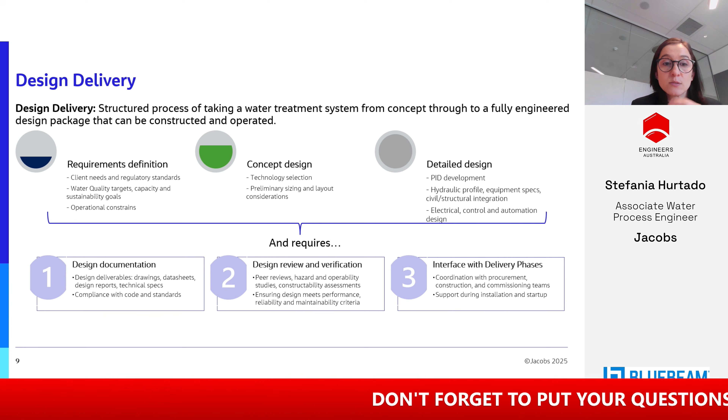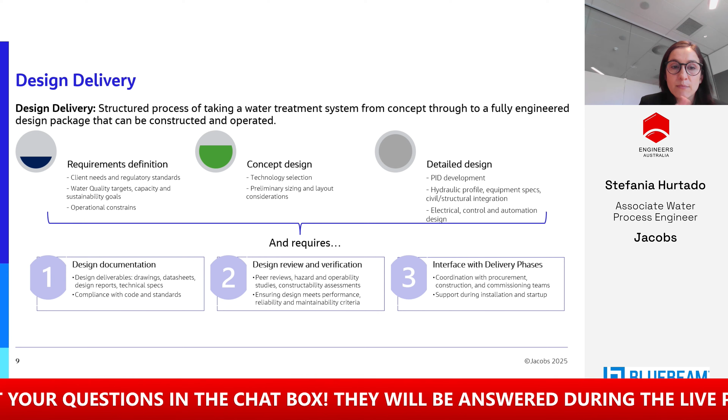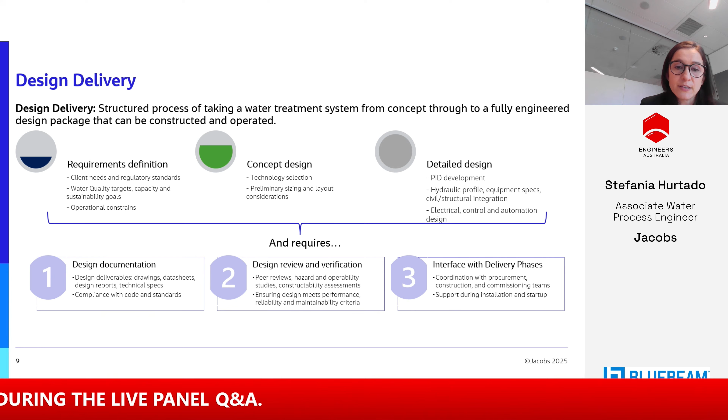Once that's done, we need to review and peer review across the team to make sure all the requirements are met for each discipline, and also ensure that performance, reliability, and maintainability criteria are met, through the lenses of constructability and safety in design.

Once the design is finalized, the process doesn't end there. We need to support the interface with the delivery phases that come after design—coordinating with procurement, construction, and commissioning teams to support the installation and startup of the plant.

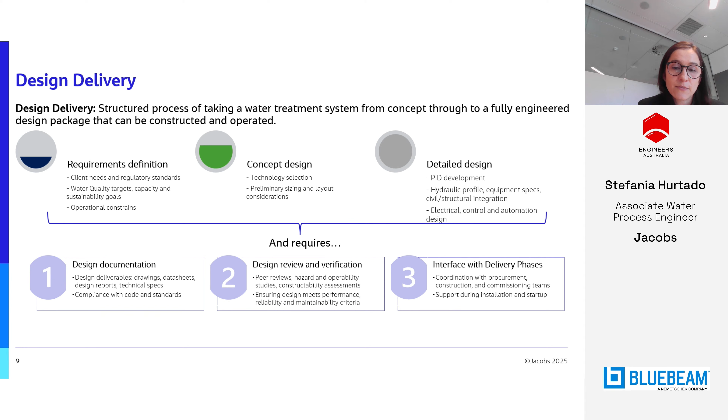Translated into a day-to-day basis, this is pretty much a workflow that allows us to put together the design over time. Implementing these steps helps us be efficient, especially when multiple projects are happening at the same time. In simple words, we have discipline-based calculations that we translate into dimensions, and those dimensions are used as an input to draft sketches.

Those sketches go into the modeler or drafter to put together a model, and then this 3D model is cut and basically used to cut the drawings for a standard design package.

Once the drawings are cut and the model is done, there is a period where technical review happens across both types of deliverables, and then the consolidation of multiple discipline feedback is collected in a way that is easy to understand what the clashes are, if there are any conflicting solutions, and how to resolve particular issues found during this period.

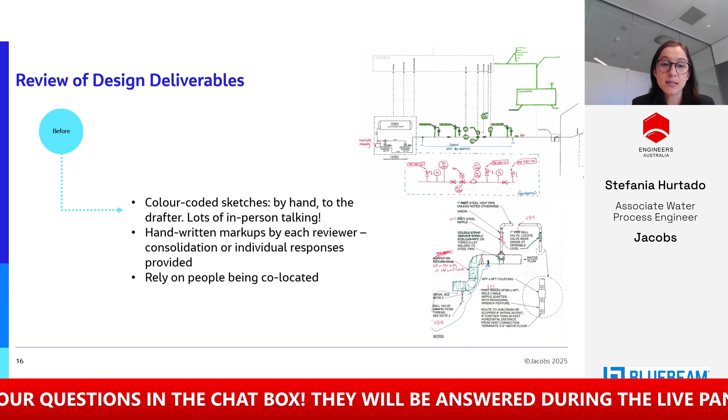There was lots of talking in person. You were sitting next to the drafter, sitting next to the reviewer, and you were chatting all day long about things that needed to be refined in the project or the particular package you were working on.

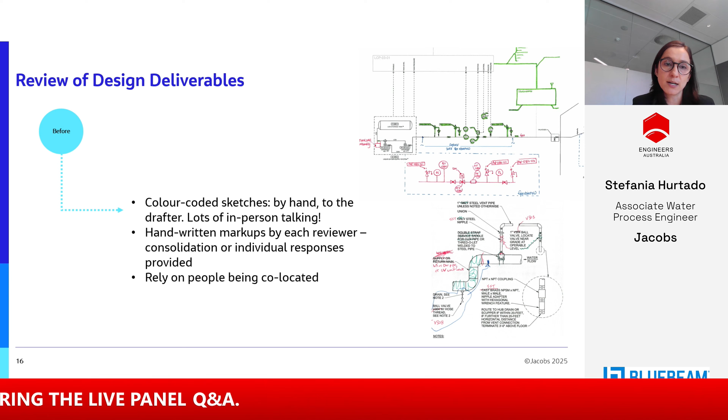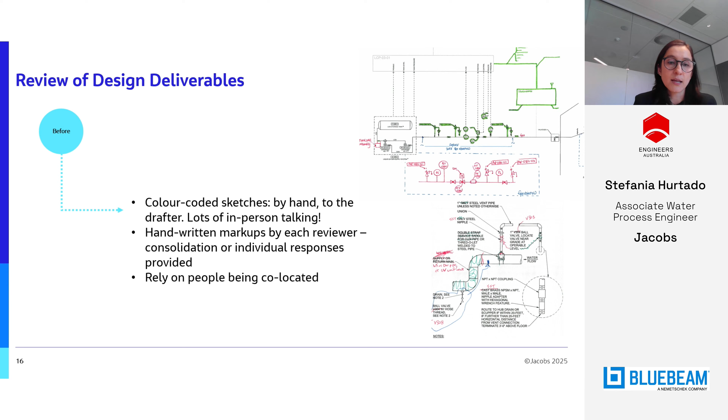Once drafted, those markups were reviewed by a reviewer, and comments were provided again by hand and collected by someone. So there was a collector. Usually this was a grad or an intern, and that person spent lots and lots of hours trying to collect hand markups from 20 people in the team.

Once those were collected, we used registers and logs referring to specific drawings or specific areas of the drawing to help with referring back to those.

We addressed markups by hand at that time. So anytime you needed to put something, you put it on top of it, and you kind of crossed out, again by hand, the things that you had addressed.

There was no tracking of consolidated comments except for that one register, but it was really hard. You had physical prints of the P&IDs that you were archiving in physical archives in the office, and it was a bit of a struggle trying to go back to that. It required time.

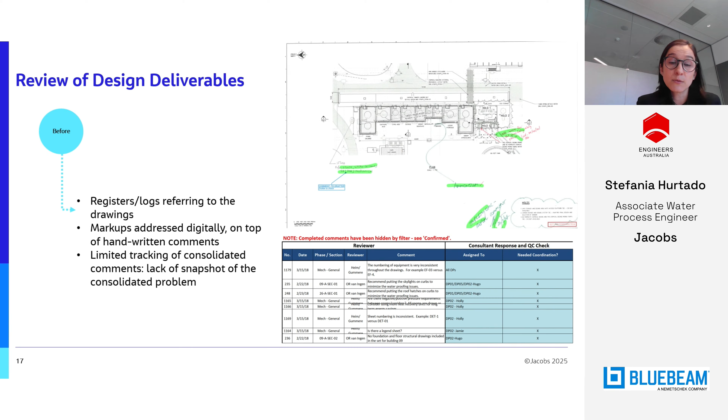So then we realized that we could standardize certain things to allow us to do things faster. This is, I think, when we started what I call the beginning of the change. We started using simple tool sets in Bluebeam and Visio.

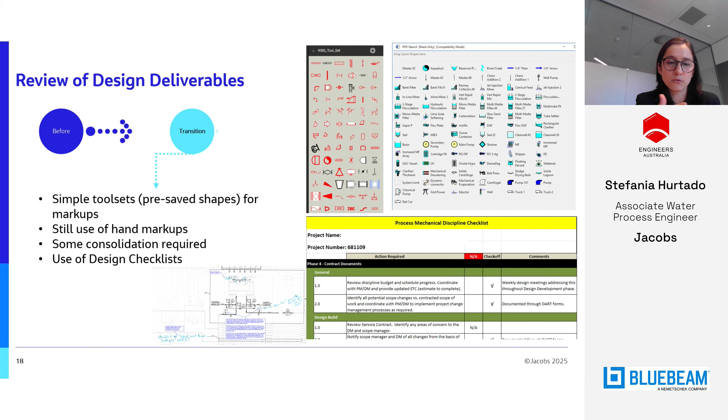We started seeing people using tools to reply to review comments in PDF. There was a mix of hand markups and digital markups on top of the hand markups. And for quality, we defined and used discipline checklists to ensure that reviews and checks were done the same way, looking at the same things over and over again during the design phases of a project.

Now we're fully digital because we were forced to accelerate the learning curve by working from home. So we completely shortcut the consolidation step. Again, no time allowed for that.

And then the sketches, now we have the ability to draw them digitally. Comments are usually placed in one place, and then you have faster troubleshooting because you have everything recorded in the same way in a simple, consolidated place.

The tracking happens in parallel with addressing the comments. There is no grad or intern that consolidates the comments anymore. They actually are very active in the development of the design, and everything happens a bit faster.

There's not a single software that will accomplish everything you need in one go. It depends on what you have available, what you feel more comfortable with, and what is defined as the best practice for the project.

So I'll talk about the ones that I have used so far to develop my design sketches, and I'll show you a little bit of the pros and cons in my view that have helped me using one or another. So PowerPoint is very familiar to everyone, is universally available. We only need the standard Microsoft Suite in order to use it, and it's very practical.

The problem is it doesn't come with a toolbox, doesn't track any changes, and it's not identified as an engineering tool as other tools that we see in the market for the same reason, for the same purpose.

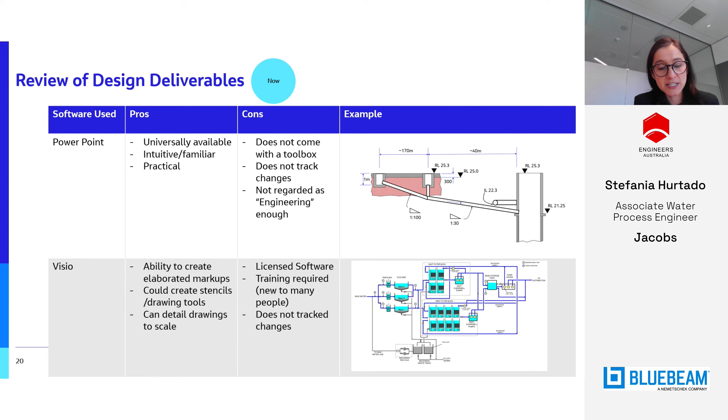Bluebeam is quite a good one. It's good for detail and dimension drawings, and it produces great drawing markups. It comes with the ability to use a tool chest and library of symbols, so it's easy - technically easier because you just drag the symbol and put it in there, and there is ability to produce very, very detailed, almost as-built drawing markups.

What I love about Bluebeam is that it does provide the feature of consolidating the tracking of comments, and what you see there is an example of how that looks.

You can do it in PDF, or you can export the PDF tracking log or comments log into Excel, and there is ability to filter by a specific topic, by a specific person, or by a specific drawing. It is a licensed software, so there is a little bit of reluctancy sometimes, especially when the other party doesn't have the license, and there is some training required because there are so many features available to this tool that it requires some dexterity to use it better.

Outside of the engineer fraternity, people are not as familiarized with this software, but in general, it's a great tool to have.

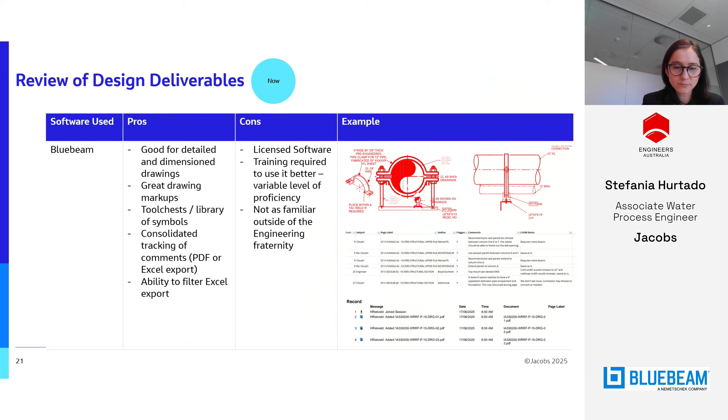Because it's so great, we have been using Bluebeam a lot for different purposes during the design delivery. It's becoming our repository of drawings, especially P&IDs, and the main software we use for design reviews of P&IDs throughout studio sessions. We follow a folder structure that allows us to track individual design packages, disciplines, and design milestones all in one place.

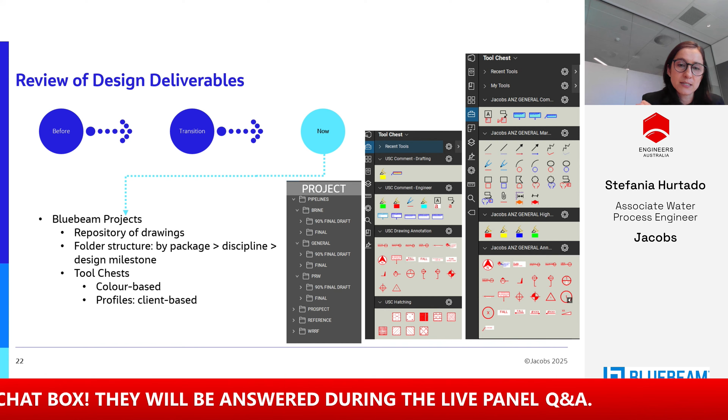You see the example there. The project is split by pipelines, and then the pipeline has the brine pipeline, and then you have 90% and final. It's basically a way that we found to be able to track things easily and have everything in one place.

We have developed tool sets that allow us to assist not only engineers but drafters with the markups. So we have color-based profiles - one color for the engineer, one for the drafter - usually based on client standards to be able to draw things. What you see there is the two toolsets that we have for one project in particular.

And then the other one is the Jacobs general toolset that we use for pretty much any project.

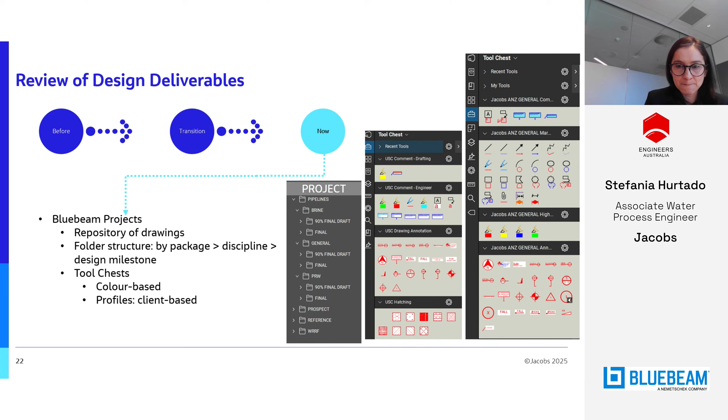The studio sessions are what we use in order to do interdisciplinary reviews. The nicest thing about this is that it records or serves as an archive of all the different rounds of reviews that have gone through a particular drawing or set of drawings. It's easy to track because you just page through and go from the latest to the oldest version of the drawing, understanding what decisions were made to get to where you are.

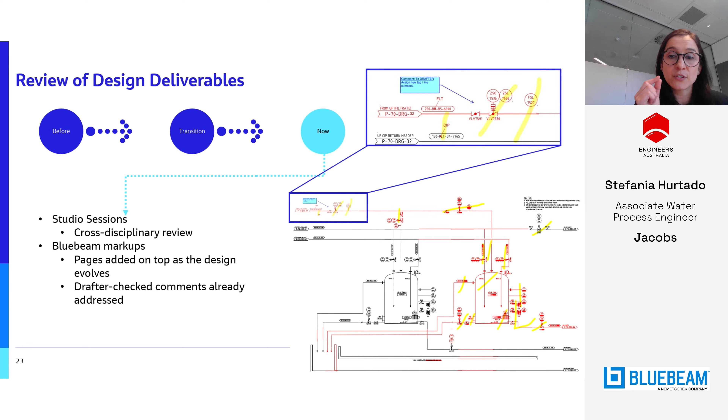The drafter crosses the comments in yellow, and that's how you know it's closed. This is all to be able to see where we're at, what has been addressed, and what is left to address on a particular drawing.

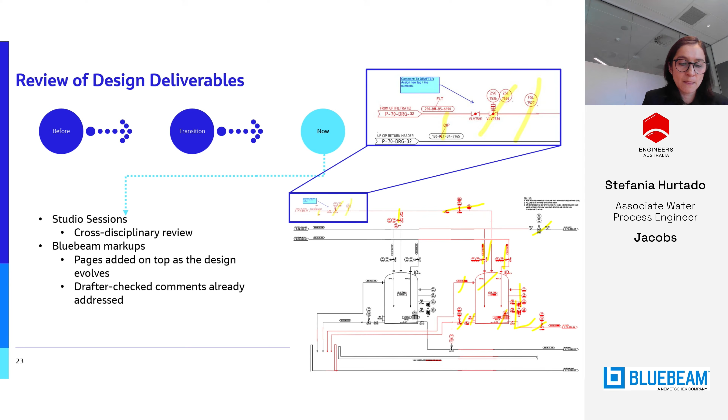For the past 3 major projects at least, I've been involved in using this other software, Revizto. We use it to access, review, and discuss the model internally and with the client. This software is very nice because it allows you to provide markups directly into the model with the ability to load sketches into it. So you can produce your sketch in, say, Bluebeam and then upload it to Revizto, or you can do it directly, a bit more limited, on the model itself.

Once an issue is created - meaning anything you want to comment on the particular model you're looking at - you can allocate that to disciplines down to a person level. So you say, I need Sam the drafter to address my comment, and you can allocate that to a person.

You can put a discipline and characterize it as much as you need in order to identify what the issue is. The other thing that's nice about Revizto is that it allows you to track the status of the issue, so you can know if it's open, in progress, solved, or closed. That way you know how far in the process of review you are, whether it's with the drafter, back to the engineer for final closure, or finally resolved and no longer a discussion point for the team.

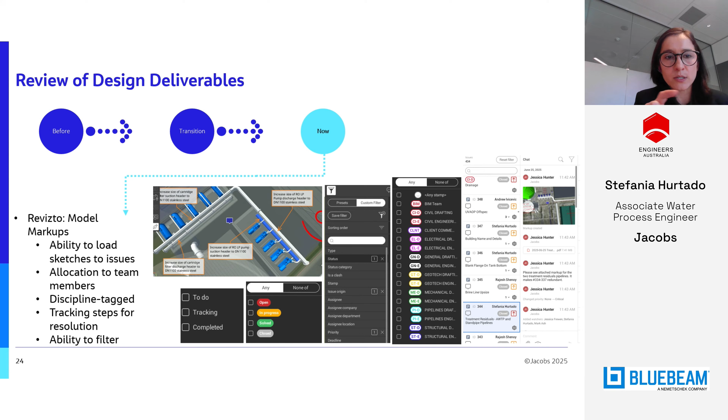Looking ahead, we see how the concept is evolving to digital packages that we customize for each project. So you'll have a set of different software options that are best for one particular project or preferred for some reason. Sometimes it's client driven, sometimes it's just the nature of the project that allows you to use one software instead of another. There's now a need for the integration of, say, BIM 360, ACC with PDF editor.

What I'm trying to say is that we need the ability to click on the model and then see a particular drawing associated with that area in the model. There's more and more desperate need for consolidation so that reviews happen in a much simplified way. Potentially in the future we'll see the need for not drawings anymore, just the model, which is scary to think about, but yes, we're moving towards that.

Now we have digital twins, so we're able to simulate and monitor the entire water treatment process by using operational data that's plugged into the software, which gives you trends for the future. So all of this to say, we are still evolving. We're moving towards a future that's pretty much uncertain, but it's looking like the trends of efficiency are also looking at making things faster and smarter.

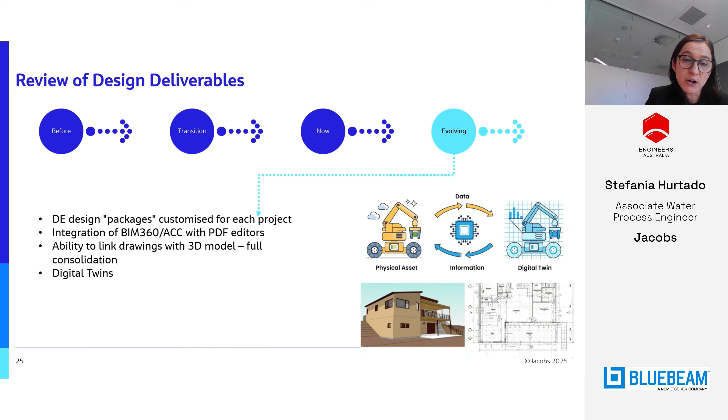So what we learned today: these times are challenging. Today's world is asking us to do more in less time, and therefore the ways of working from a decade ago are now out of date and require us to come up with better ways.

Smarter comes with innovation and adoption of new software and tools that get us there. There's no way that we can do this alone. We need workflows, we need tools, we need to use as many things as possible to produce the same high level quality of deliverables with all the constraints around how speedy this world is.

Adaptation to digital and adoption of new technology and software is not easy, but we all have to do something to bring it to the table. So this is my invitation to you.

Depending on who you are in your career, you might get familiarized with one or another. For seniors, seniority tends not to adopt technology easily. They don't have the technology dexterity and could become a bottleneck if they decide they don't want to use whatever is being put forward for the project. They're the ones that give us the final blessing on deliverables, and we need to fight against that resistance so we can get the whole team involved in using the same software.

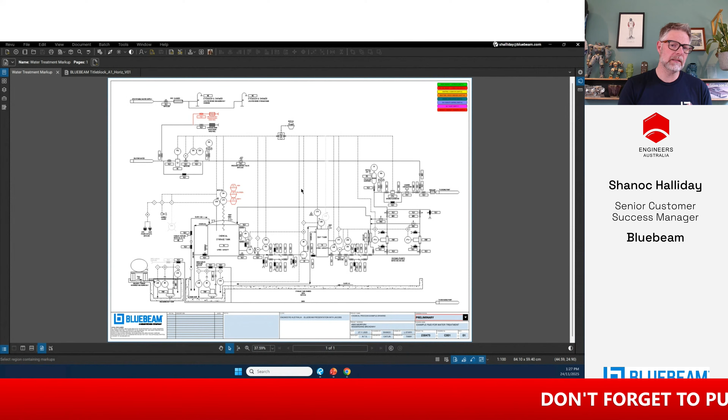And it really requires them to build out a good library, so almost like a CAD-like standard within Bluebeam. But what that means, though, is there's a lot more efficiency. So as much as I don't want to take out my fellow draftees, they're not having to do draft and redraft of early concept drawings. This is P&ID, but I'm reminded of my time of shopping centers and just everything changing so rapidly so often, and trying to keep up that momentum and delivery dates, where it gets so much easier when it's just simple plans to be communicated about the construction required.

So in this example, I've got a title block, and I've got the chemical treatment for chemical water treatment, P&ID.

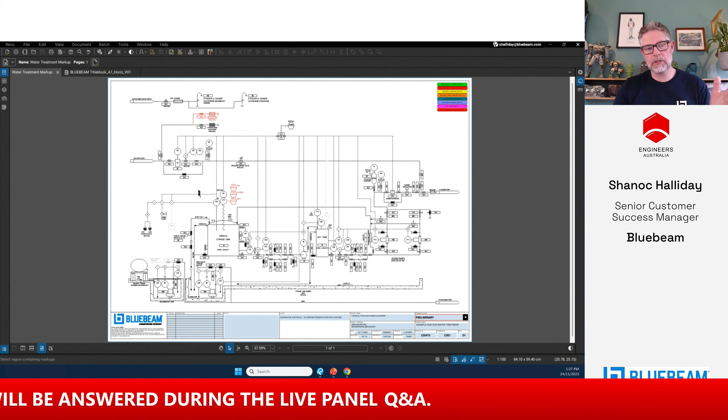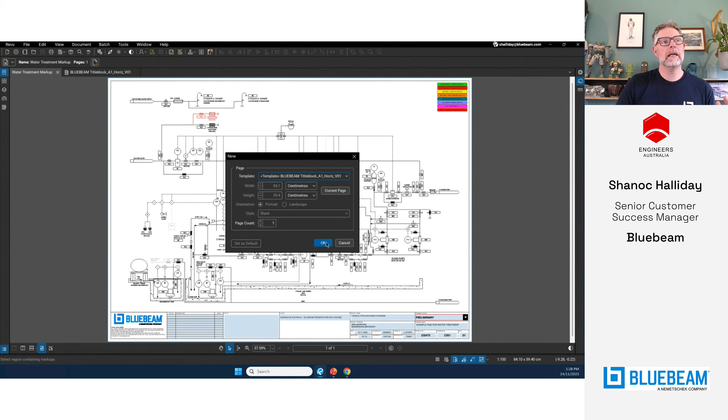So let's start from scratch. How do we get this information here, the title block? Well, in Bluebeam, you can go into File, New PDF, and create from a template, just like a CAD standard title block. I've got a few different examples, but I've chosen my A1 horizontal as my default, and I click OK. Sure enough, that brings up my title block.

Tip to myself, I probably shouldn't have set the scale just yet, but it doesn't really matter. So what is this information? It's easier to pick it up from your authored software, whether it be MicroStation, AutoCAD, or Revit. Get the PDF of that title block or title blocks, delete the information you don't need. If I go into Edit and go to PDF content, I can cut or erase content and remove what you don't need.

So I can create my own variables within Bluebeam. Those variables are basically, say, this drop-down menu I have - I can say it's for review or approval, or whatever the requirements I need. But also, if I look inside here, I've got my project name. We type in capitals, we can add a name. But how do we keep this formatting, or keep the standardization, keep it professional?

This is all done through our forms. I've got this set up on the left-hand side - yours might very well be on the right-hand side. If you can't see it all, right-click and go to Show, and you can see all the actions that you have available. Once you've got the information here, you can see the different types of forms or labels that we can create. This is the same as what you might get inside Word documents or any other PDF documents.

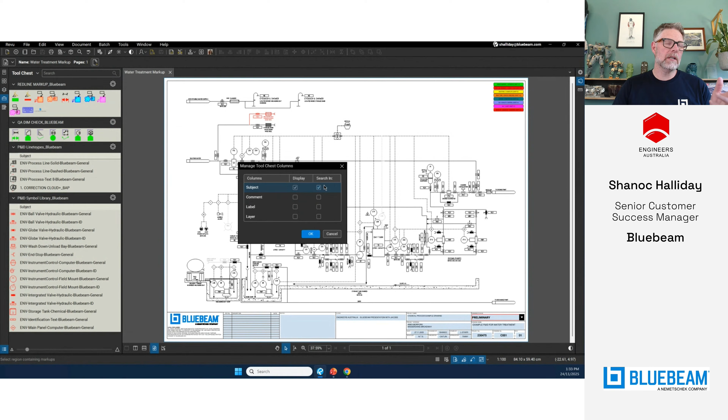I think it was version 21.4 or something. It gives you more options now to think about standardization of your library. So let's start using it and see how we can leverage this.

I'm going to come into here and pick on this object. I know it's a field information, but I was just talking to a client about this the other day. If I had a massive library of all the different types of valves, instrumentation controls, and everything I need for P&ID, the client said they're scrolling up and down all the time trying to find information. Well, we don't need to do that.

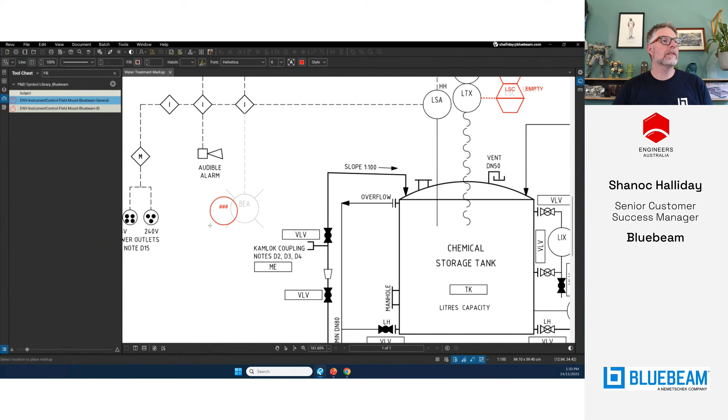If I was involved in this all the time, I would know it's a field element that I need. I don't need the identification on the side. I can simply just grab the simple control that I have and put this on here. I've also built out other things in the library.

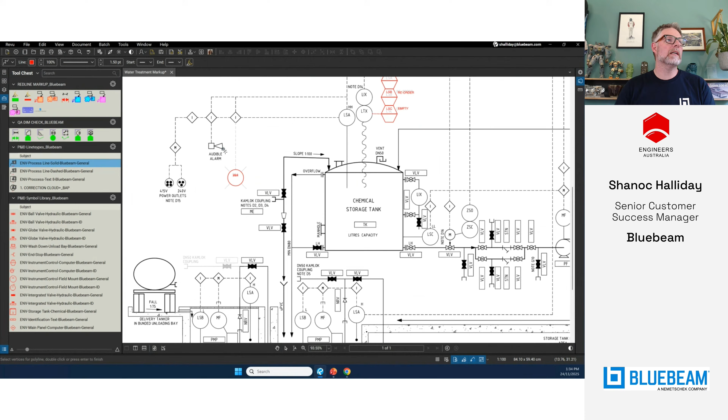I know I'm going to be drawing lines a lot, so why would I want to do a line from scratch? Why not set the line to my office standards? I'm using a polyline here because, as we can see, we go around corners a lot. I thought we'll do a straight line... no, polyline's better. The little tip on this is you can just double click at the end and it finishes up, so it can just be a simple, short, straight line anyway.

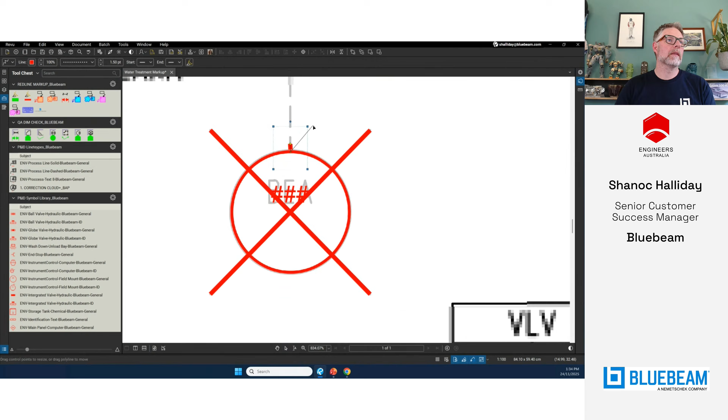Now I can come across into my dash line. I can pick up on here. If I did that properly, that would help. Let me pick this up, scroll out, and hold down Shift, and it gives me a nice straight line.

Now, I was thinking earlier, I don't want to do a right click every time - it's a bit annoying. So customize your ribbon, and I'll put this on top here. Just want to be quicker and more efficient, right?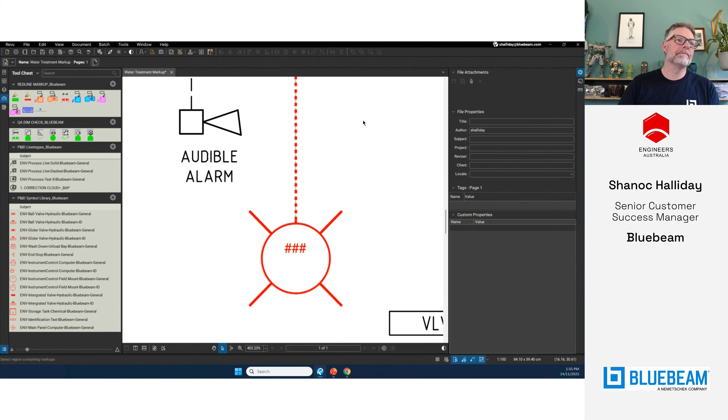This markup here is just simply two markups: a text box and a circle, which means my tip is make the text box the last thing you actually do when you select into it - it makes it easier to edit. So I'm not sure, was it a VLV? I can't remember, I could go back to highlight and check on that. No, it's a VLV.

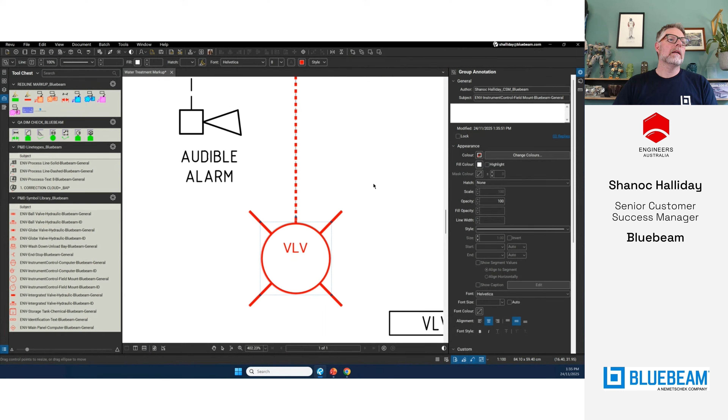Now, a new feature that's come out - and I can imagine this really being frustrating in older versions of Revu - if I do a rectangle on top, that's R for rectangle using my shortcut keys, and I wanted to select this field instrument, honestly it's just frustrating and a little annoying and takes up too much time. I could look up through the markup list and try to find it, maybe with a search, but the good news is that's all gone away.

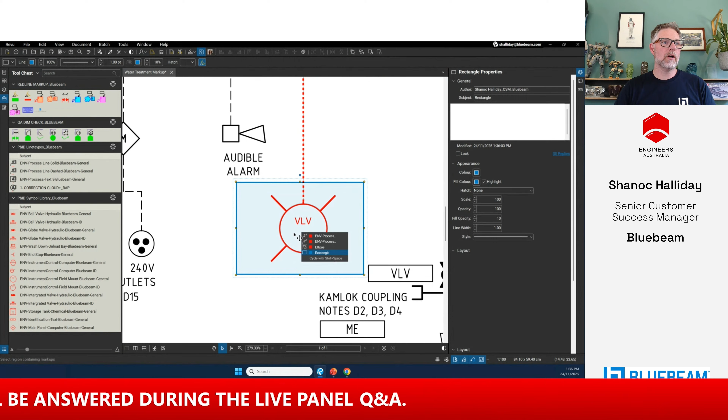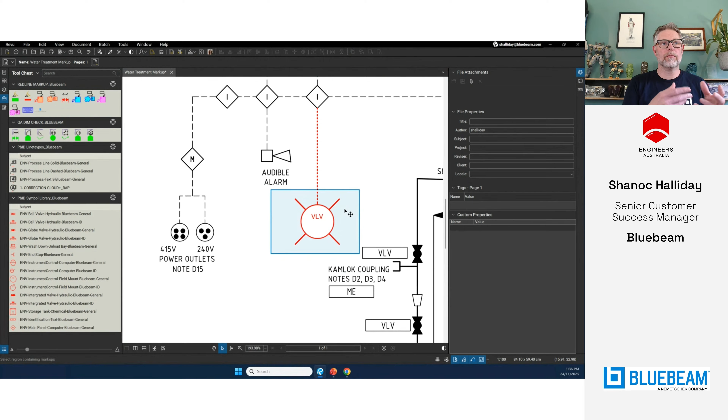What I mean is we can actually hold down the Shift key and cycle through this by pressing the space bar - cycle with Shift and space. This is a fantastic, welcome improvement. I need to make this pop out, I want to make that stand on top again, and I can do that very easily. You're probably not typically doing a rectangle, but you can see how you might have multiple markup elements on top of one another. Now it's really easy to cycle through those to select, change, edit, or delete it, whatever you need to do.

All right, let's move on to some other things. If I want to come into here, this one here, I've got an integrated valve. I probably could have done a search again, but here are some other tips as well. Inside here, when I try and come onto the line as best I can, I could tweak it afterwards.

A bit frustrating that I've built this with the identification of the box and text below it. But if you click on the markup and hold down the Alt key, it gives me access to all the markups inside that group. Group is made by right-clicking and grouping it, or Control-G. So I can select and drag that information as required, and it stays within the group. I'm trying to make it look easy because it actually is. There we go, now it looks nice and neat, and I can do my VLV here.

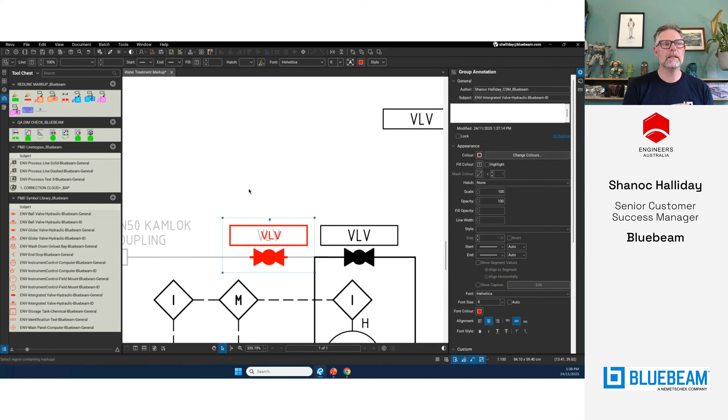I think back to the time I was drafting, and I know this is engineering and you've done computations, but you don't want the time taken up communicating the drawing. The complexity is engineering - yes, we need to make the drawings easy enough to read, and every line and piece of text is important, but you don't want to take forever to put it on the page. So where are those 1%ers to make it a bit easier? We don't want a library with text above, text below, and text to the side - we want more opportunity for variation.

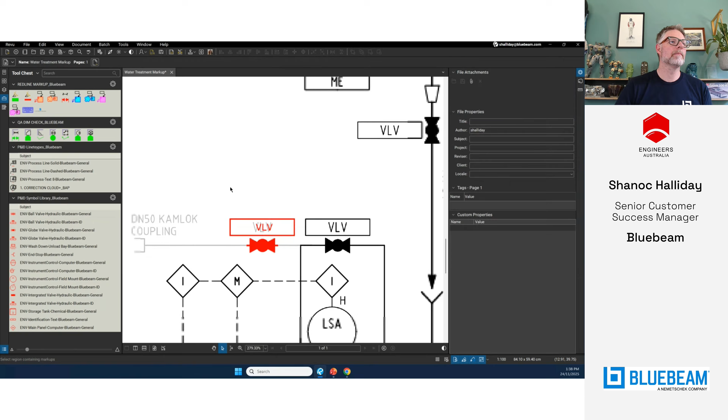Coming into this, don't pick on my naming convention here, but I call it an end stop - I have no idea what it really is. I hope you find that a little bit comical, but it's really important and it needs to be here. So I can come into here, and I've got my little flip command. I could do a shortcut key, but I kind of like that visual reference. Now I'm just using my arrow keys to move that across.

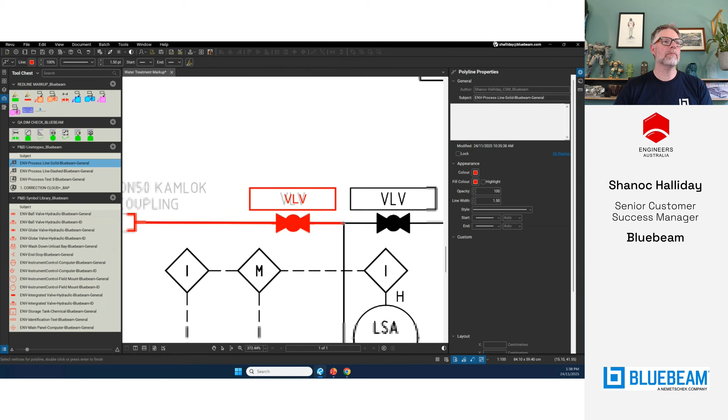Picking up, just to finish this off, I've got my process line in solid. I can take that through and finish it with my snap points. Pretty nice and simple and clean.

I said I'll show you about the snapshot. So let's assume for a moment that this information is really important - it undoubtedly doesn't, but let's just pretend it needs to sit here as well. So I'm going to use the X in my shortcut keys that I've created for cutting out. I need some space here, so I'm going to cut that out and Control-V that. Now it's just an image I can move around. And now I'm going to use a G.

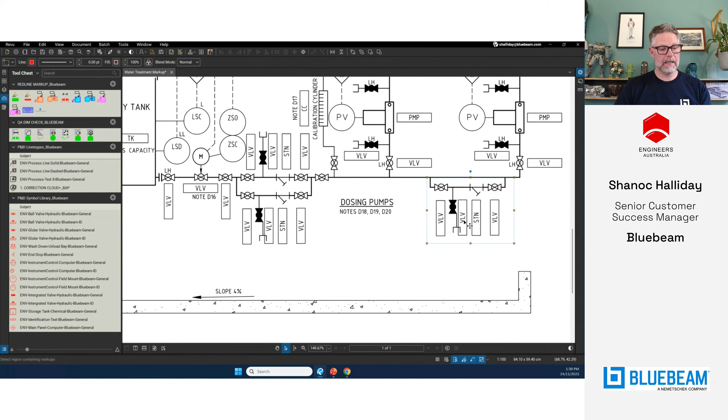So that's actually in Edit, Snapshot G. If I go to Snapshot G, I can pick up on this information here. And now I can paste it here. A little tip - if it's going to another page it's very similar, you could easily use Snapshot Control-Shift-V, it does exactly the same location. If I right-click this, because we need to identify that's a markup, or we used to say an angry markup, it's in red.

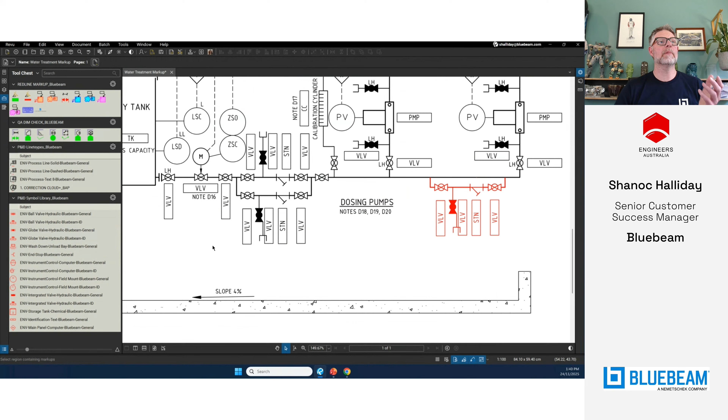Here we go, not pink Shan, we'll go for red - we can change the color. So you can see very quickly we've highlighted this as a markup. I know a lot of engineers like this, especially around P&ID, because you might not have the library created, but need to quickly smash out another PV or pump, something like that. So you're communicating very quickly. This could easily be in black, make some updates and issue to the client for review.

Picking up on this lastly, I want to go into my red line markup process, or my QA/QC. I'm just going to apply in here. A new update we've done is enable number shortcuts, so now I can set some numbering to this. Previously that was only in my tools - now I'm just ditching my tools and doing number markups as required.

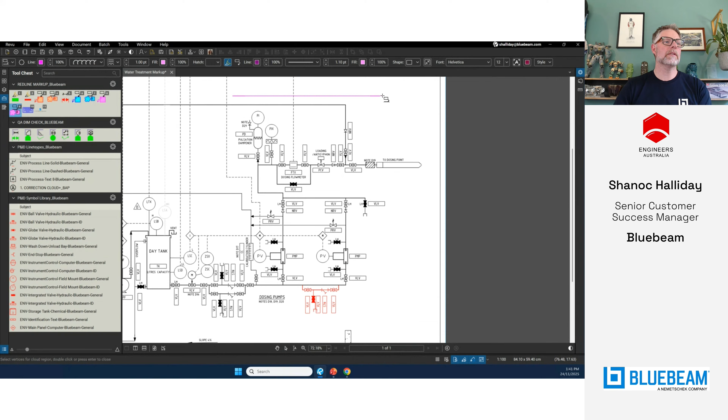So I need a number 9, which I would normally remember, but just to point out to you guys, number 9 in here, because I've got something I need to put on hold or have a conversation about. So do a single click this time instead of dragging a rectangle, and say something is concerning about this. Let's just go around it - try not to take too long for the demo. Close that, and I'll just say on hold.

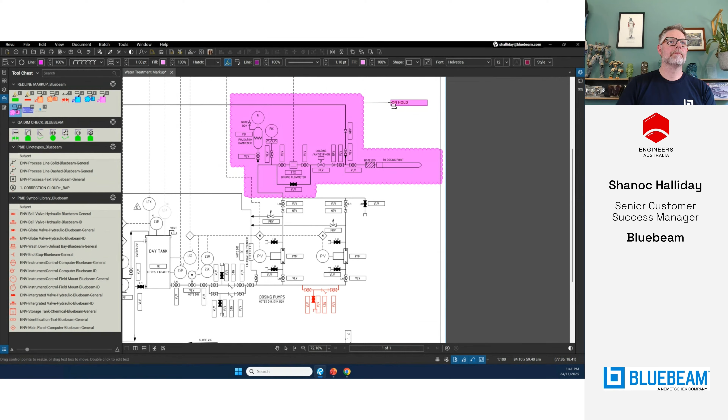All right, so we're almost set up for a studio session. We want to collaborate with maybe an interdisciplinary review with another engineering or consultant, or it could just be internal design reviews, before we actually issue these to construction for the documentation we're going to issue.

So typically this requires a process, and Steph talked about that process in previous markups and having particular colors. Now, this isn't necessarily Jacob's way, but I've spoken to so many different engineering and architectural companies - there is some process, or I hope you have some process.

In this example, we can really just focus on steps 1 to 6: this is great, done a fantastic job, I've got a correction, it's red, I need this done. It's been completed by the drafting staff, it's being back-checked by the drafting staff, then back-checked by the person who made the original markup, and then it's had a quality control - before it got issued to construction, somebody else peer-reviewed this, the QC, and said yep, we can actually issue these drawings.

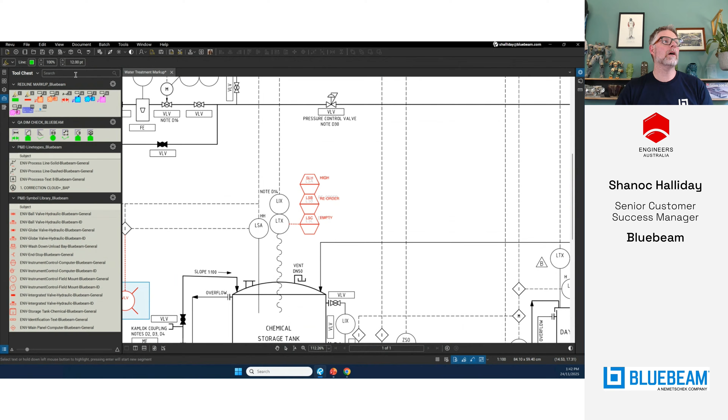So, ways to improve things. I see often enough, and there's nothing wrong with this, just different ways of doing things - I might see a highlighter setup. We do a highlighter, first process being yellow, so I'll keep this up here. Yellow, I'll change it to a yellow highlighter, and I'll say yes, I've done a great job, and I've done this - that's all completed.

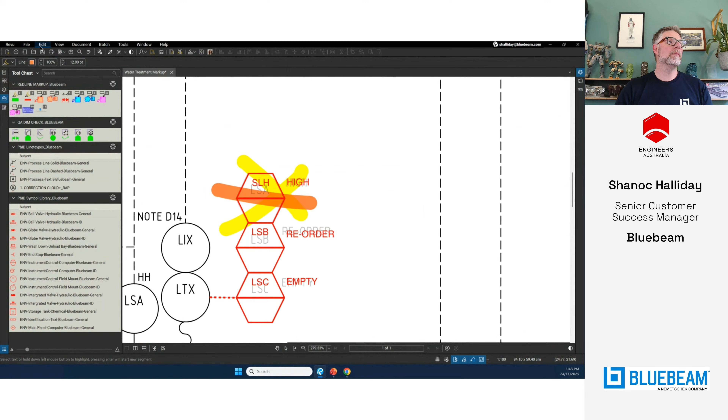Then I'll do my back check. I'll say in my orange, yes, I've done my back check on this. And then it'll be someone else doing their own peer review, so I think I've chosen a dark green or something for that - so there's my peer review. And then we go into a QA/QC check, we might do another color.

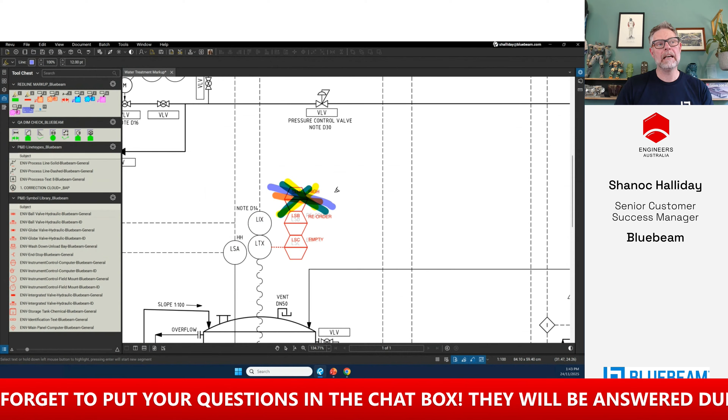I've literally seen thousands upon thousands of drawings on paper that I've done this, and probably equally the same within the PDF. What we can do to really speed up time, and be more efficient and more data-centric - which is powerful because we can filter that information - is using statuses.

So statuses, it's a right-click away, or even better still, we've incorporated shortcut keys. It was a bit of a user request for a little bit of time, and we've incorporated it. So my little tip here is, following those steps I've denoted up there in the top right-hand corner, 1 to 8, we automatically assign statuses in order of the way you create them. So naturally, I've made them shift 1 to shift 8, so it easily aligns to it.

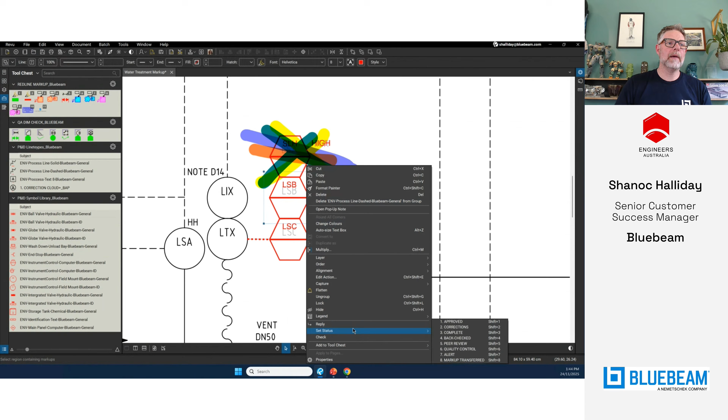So if I right-click again, and then go into my status, I can say this is now completed, and yes, it goes yellow, just like we had a highlighter yellow. But I think what's more interesting - because, look, that is a little bit harder to see, I get it - what isn't hard to see is that with this markup now is a status that Shanoc Halliday, the CSM for Bluebeam, on this date has actually completed that markup.

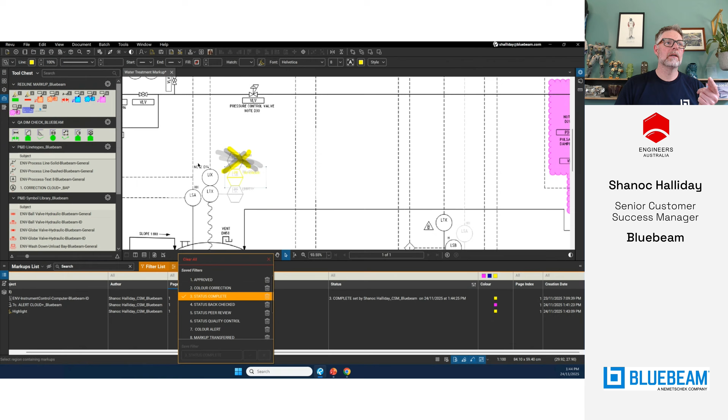Now when I go into my filters and I want to know what statuses have been completed, I can see what statuses have been complete. By the way, I've just put a flag on here, like a filter, for anything on hold to always pop out. So you can see this starts getting much easier, because I'm looking at the data, not just the highlighters. So we can go through that entire process.

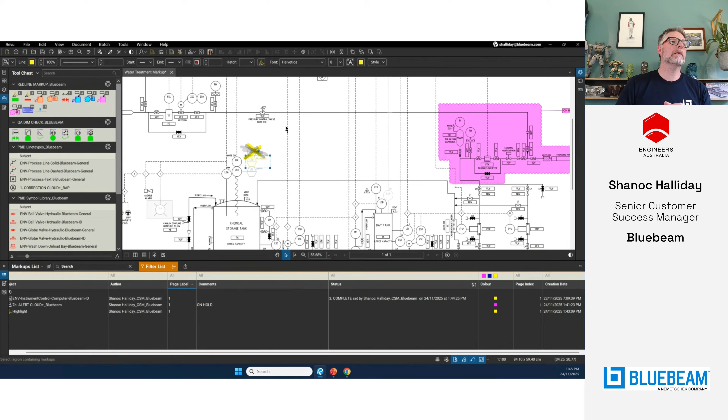All right, so let's have a look now at where we can share this information and put it into a studio session. So let's get out of this - I'll close this one down, I'll save this one, sure, we'll bring this into here, and I'll come across into my studio sessions. While this is opening up...

So Studio Sessions is a chance to share all your markups on the cloud. It's PDF based only. We can set up to share with up to 500 people at any one time, and you can put controls and safeguards inside this so that only invited people can collaborate on this.

I think I set up that no one else can join me, because I don't want people joining on when I'm doing a demonstration. But it's a great control mechanism inside this - if you are not the original author of the markup, you cannot edit anyone else's markup. You can only change the status and do a reply. So it's really about that collaboration point of view, and not deleting other markups.

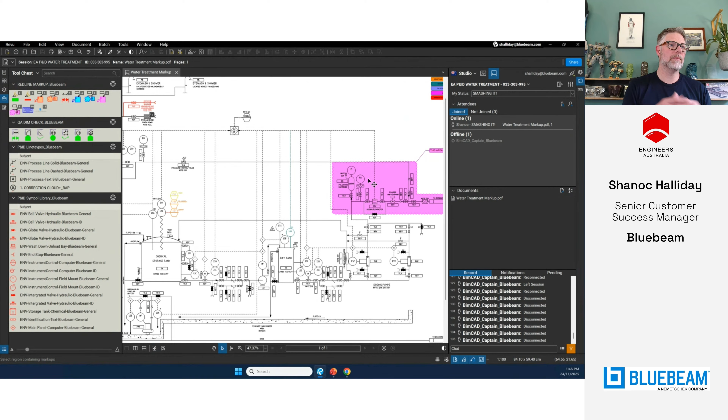Inside this, we have full traceability of who's been in and where. I personally found it quite challenging when using a resource center, simply because of different time zones, languages, skill sets, and general demands of where people are when emailing markups.

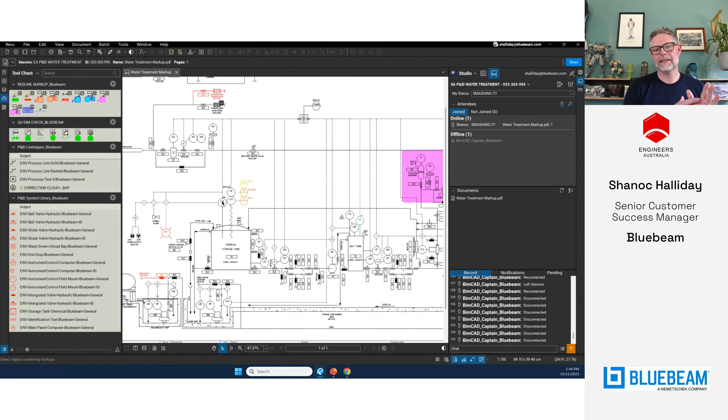This is fantastic, and I tell clients again and again to use this, simply because you can see live where they're actually progressing. This also works really well when you're working with clients, because you could have, say, a boardroom meeting.

You could invite everyone along in person if you want. They have their own laptop, invited to a studio session. On the boardroom wall, you can have the studio session lit up there, and you can see everyone moving around the page, or follow people. You can definitely see their markups on there.

Interesting enough, you can finish your meeting at the specified time, not having to go over, and just say we'll keep this studio session open for another day or two, or a week.

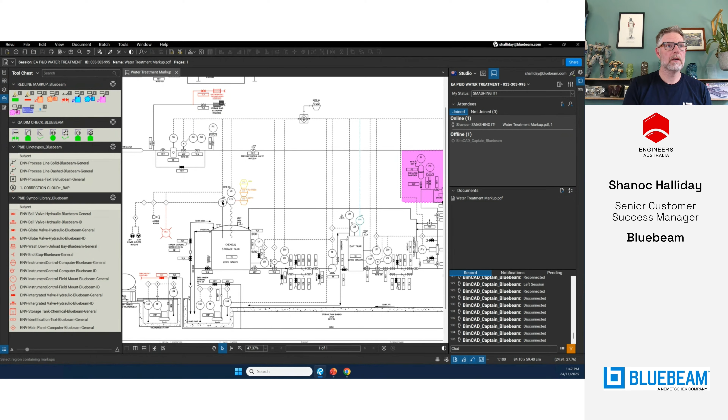So we've got clients in different types of projects. They'll have a 2-week window for peer reviews on all their studio sessions on their infrastructure project. On a project like this, you might work with a government department and you're about to issue these drawings. You might have a 3-day window to review these drawings and have some comments come back on it.

Now, when it comes to the collaboration part, I want to open up to the fact that we have a new opportunity to jump into as well. So right now, I'm on Bluebeam on the web.

Bluebeam have done a lot of work in recent time to really open up or lean into the DNA of just collaboration anywhere. We could put this on the phone as well, but it's not going to have as much real estate, and we're not really out in the field. I want to talk about collaboration.

So we don't need to download the software. We just need a Bluebeam ID. And to that point, you actually don't need a license unless you want to initiate the studio session.

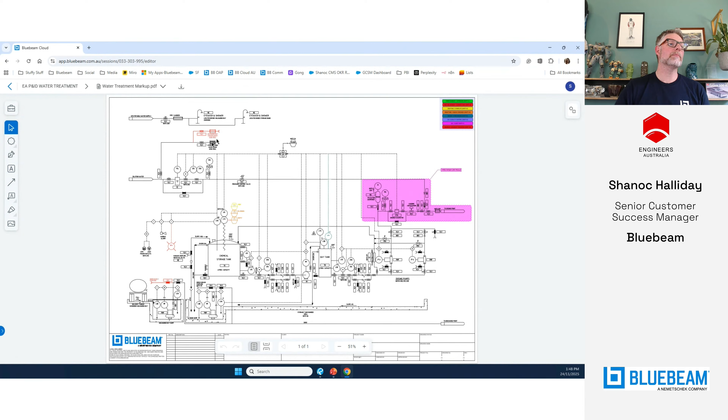So inside here, we can come into this, and any of those markups we can actually go through. If I pick up on this markup here, you can see I've gone through a bit of a process. I can go into my markups.

Just be aware, this is not trying to replicate Revu Desktop. I think this is a great companion piece, an opportunity where you don't need to educate people very much on how to use Bluebeam, because we're really stripped down to almost put the blinkers on: this is the job you need to do, and we're here for a review or collaboration process.

So inside here, I can come into this, I can say, my redline markups. This is now being peer reviewed, and all that information is going to carry across of who said it and when they said it. If I've got some issues with this, like, I keep it in capitals: I am not sure this is right. Probably should put some better detail, but the point being, I can make a comment about this.

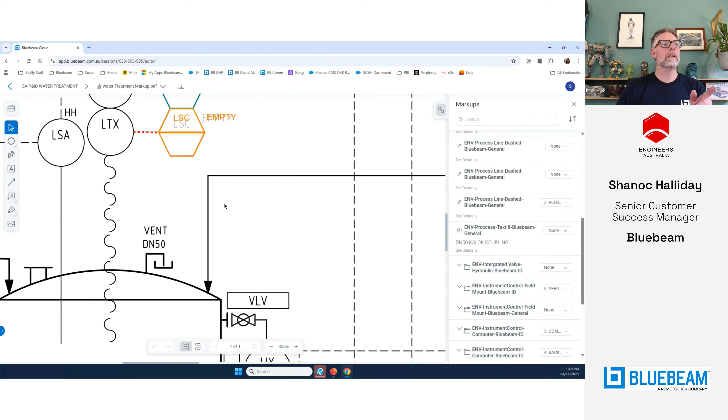Now, I talked about collaboration anywhere. So when I go back into here, sure enough, that's updated. I don't know if you remember that was orange before. I've also got some information about this.

So if I go into my markup list, I can start to track that information. Actually, it's a bit of a tip—if I click on this, it's easier to see, and I can slide across. Where is my reply? I'm making it hard for myself, I didn't click on this one, maybe it picks up the sub part of it. There's my reply: I'm not sure this is right. So we can have that dialogue about the markup.

I've seen historically where people put notes next to it, and that sounds great if you can correlate where the markups go to, but this is even easier because the original markup has a comments register to it. Inside this, we can assign custom columns, so you can say this discipline has to look at this, or this person, or this is a time frame—just like Excel Lite, you can put custom information inside this.

Another really powerful thing is that we can export this information out. Steph talked about the information - you can do a PDF report, or what I prefer is more so a CSV summary, so I'm going to Excel. I've worked with a lot of companies that have done a comments register, and I understand where it's coming from, but I'd lean towards, well, why do that? Because everything is actually registered inside here already. If you need additional information, just add it.

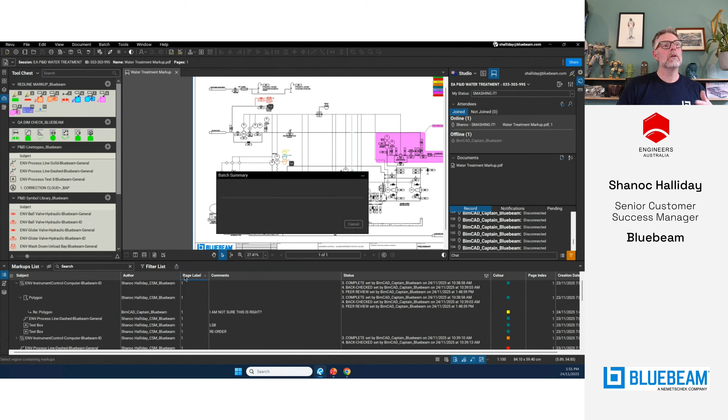The interesting thing that's coming about is that clients are understanding that this is data, and Bluebeam enables you to have clean data, and even better, when you export this information out, you can do further refinements. I've got some clients pushing this information into Power BI. While we just have one drawing sheet here, we could potentially have hundreds of drawing sheets with many markups, pushing this information to Power BI to dissect it and see what's critical, who's saying what, and what drawing sheets have real issues.

Moving forward, Bluebeam's done a lot of work on the API. So sometime in the next year, we'll have the ability to pull live information from studio sessions into Power BI. I'm really looking forward to that.

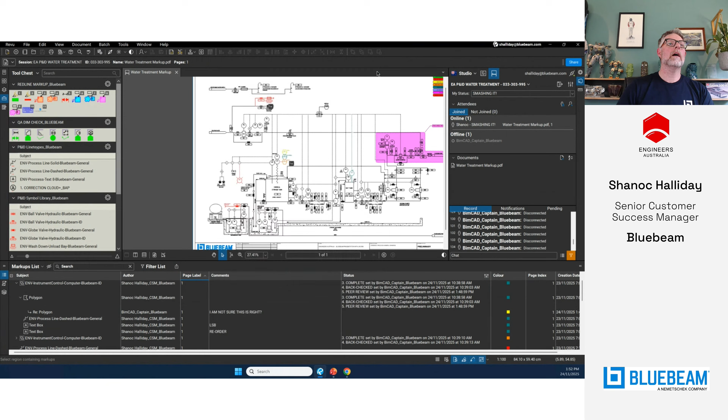I thought I'd jump out of this and pick up on the entire process of reviewing a set of drawings before issuing them out. One thing you want a lot of confidence with is that the drawings have been done correctly. So I've got two drawings here, version 00 and version 01 - I'm trying to pick up on internal versioning before you issue to a client.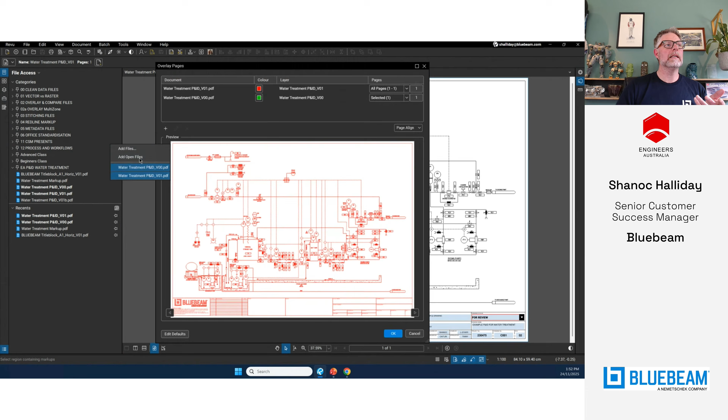Something we can do within Bluebeam is, within document, we can do overlay pages. Some updates we've put into Bluebeam is this preview window. Previously, something like this, you would run the overlay and it was terrible - you can't see that. It looks like a bad Freddy Krueger 3D film I saw back in the early 90s, too hard to read. Hopefully you get that reference.

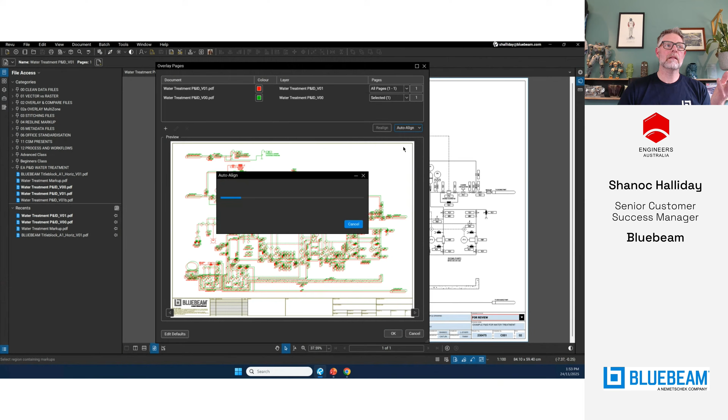We've done some updates to this, and if I use the auto-align - previously you might have used a manual align, and for a really complex drawing you might still use it. Just as an idea, you click on 3 points from one drawing, then click on the associated 3 points from another drawing, and it lines it up. But this is even easier, so now we click on this.

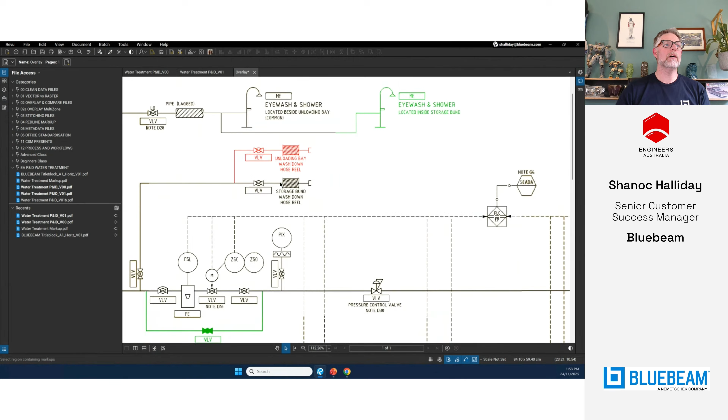We're able to educate through AI and build the algorithm, or the software, that's in your actual installation. It's not going to the cloud for computing, so it's all localized, and we can see all the changes - what has and hasn't been done. That information is also within different layers, so it's really easy to pick up and tell a different story of which one's done what.

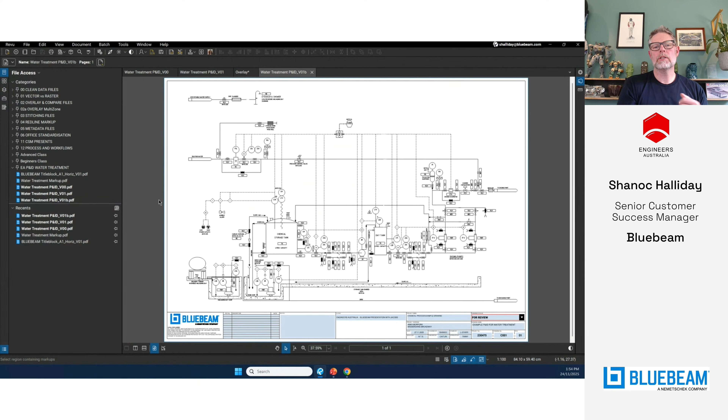I thought I'd pick up on one other one for today as well, I think it's also handy. I remember when issuing drawings, there might be a couple of weeks or months between issues, and you're trying to backtrack over all your markups, what was done. I had physical markups on the desk still back in 2016. But if you had all your PDFs, you'd have to go through all of them and find them. Well, why not just get Bluebeam to do it for you?

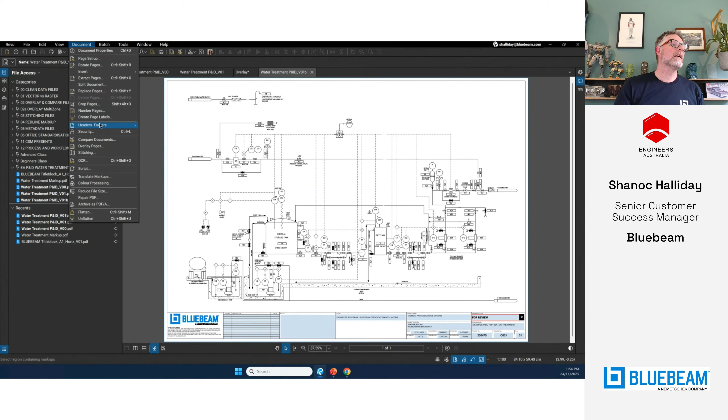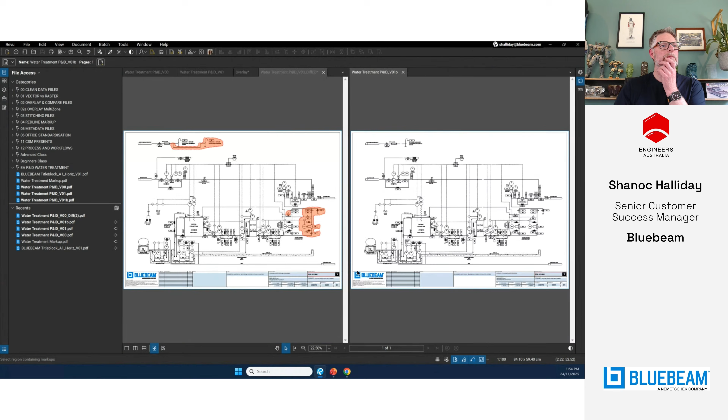So if I go into here - I've got to remember which document I set up, easier - I go into compare documents, and I've got this one here, and I'm picking up on this one. What we've done here is split the window, and it's actually put a cloud around those differences or changes to the drawings. So yes, something was completely left out at the top here.

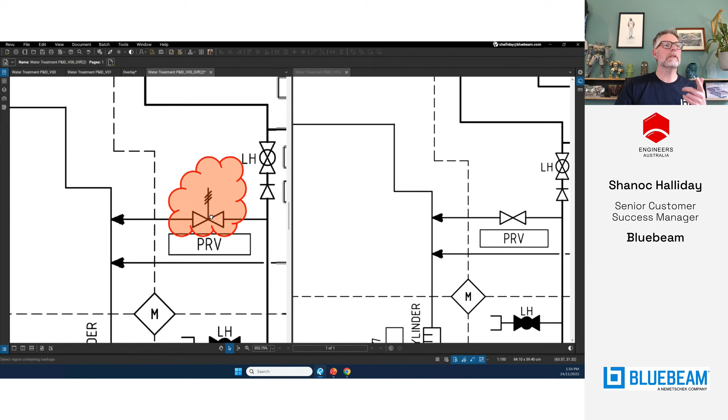Now this is the stuff I find more critical. I deleted that on purpose, but that's disappeared, and maybe that's really super critical - maybe that's a $10,000 part for all I know. Retrofitting that would be terrible. And there's been some sort of design change here - I'm not exactly sure what, but that looks similar enough to me. I'm not sure what that is.

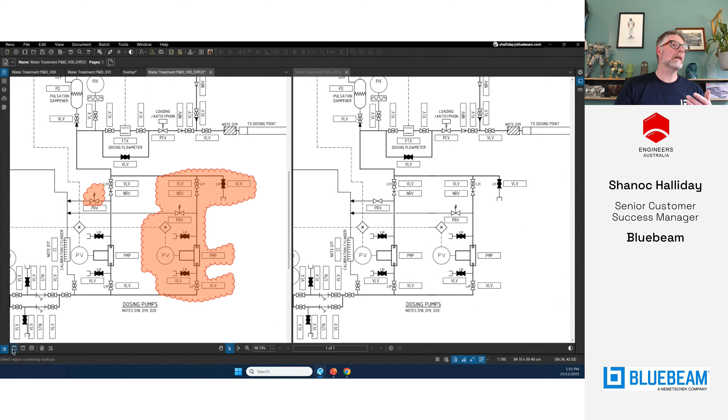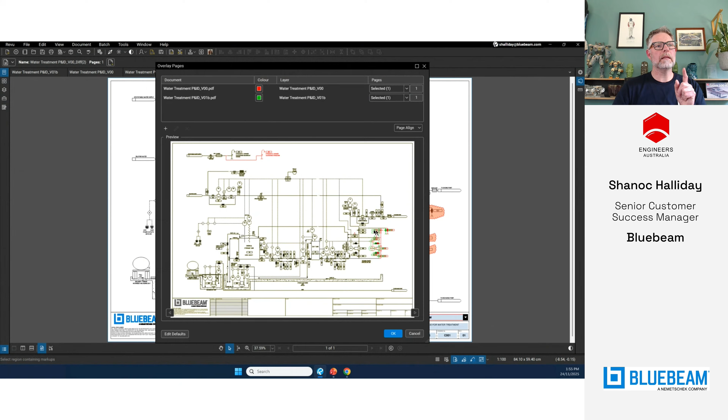So let's look at one other option that might help you. If I go into just regular screens here, now I'm going to jump into this one, which can be helpful sometimes - overlay pages. I don't want this one actually, I'm going to pick up on that one, and also this one here. I don't need to do the auto align - they're actually lined up pretty well, but I can see the drafties tweak this to push it around to make it a bit neater. I've been guilty of that myself.

So we can see that is just a bit of a tweak of a change, and I can take my time to look at it and realize they are the same. But maybe I want to tell the story easier.

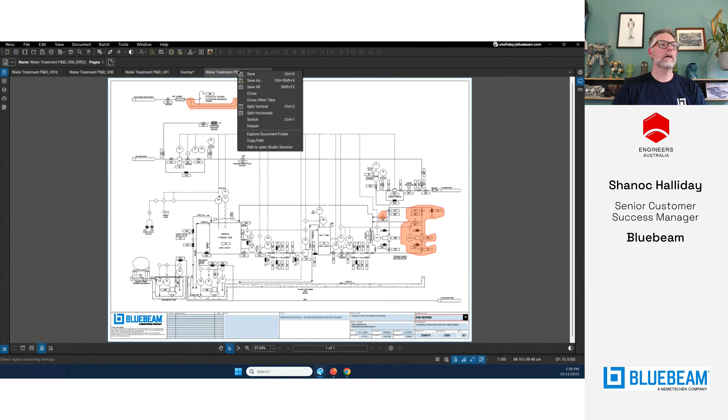Handy little trick is right-click on the tab, copy path, which I use all the time to install it or open up somewhere else, or even right-click, explore document folder. It's handy. I go into my overlay.

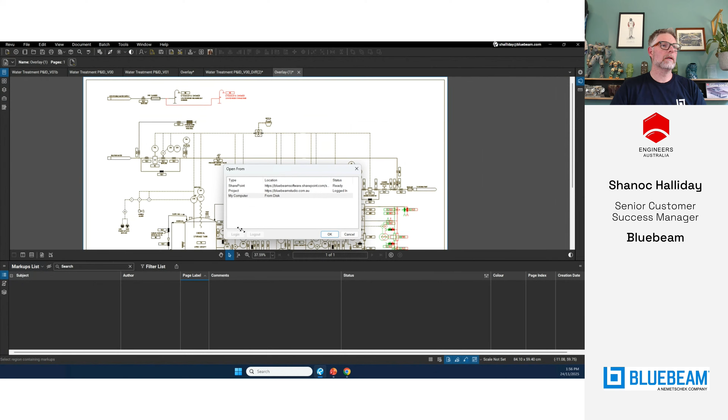So Bluebeam, all those markups is data. We can transfer that data from one PDF to another or into other software, right? So if I go into our markup list and come into our markups, import from my computer, Control V, OK, all those markups come through.

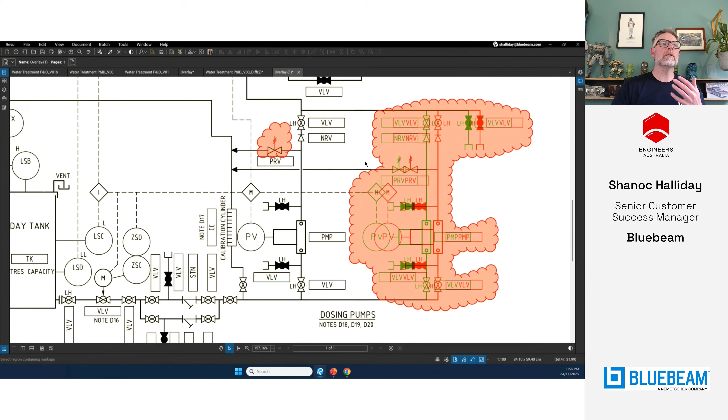So now I have a good story, when it's applicable, I guess, you're not going to do this for every time, of the story of the differences between the changes and the clouding up of those changes as well. This might be good to identify scope creep, changes, verification of additional work that's been done, because clouding is how we communicate to our clients and internally.